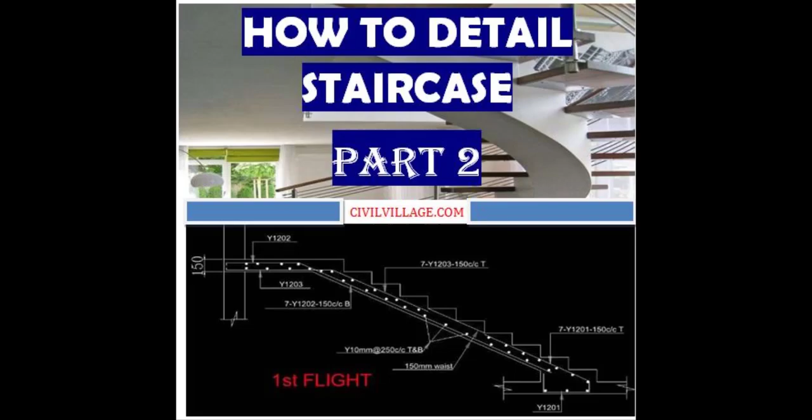Hi everyone, this is how to detail a staircase. In the previous tutorial we did the first half of the staircase, so in this tutorial we are going to do the second half.

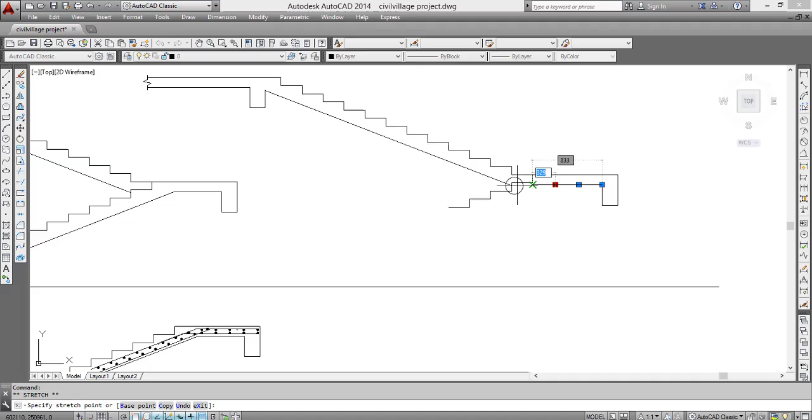As we did in the previous one, we copied this downward, so we are going to copy this one also, and copy it to one side so we detail it separately. Let me fine tune this so that it will be okay.

This is it, so we are going to detail this. Before we start, this is the landing, the first landing, and up here is the slab. This half of the staircase will connect to the slab.

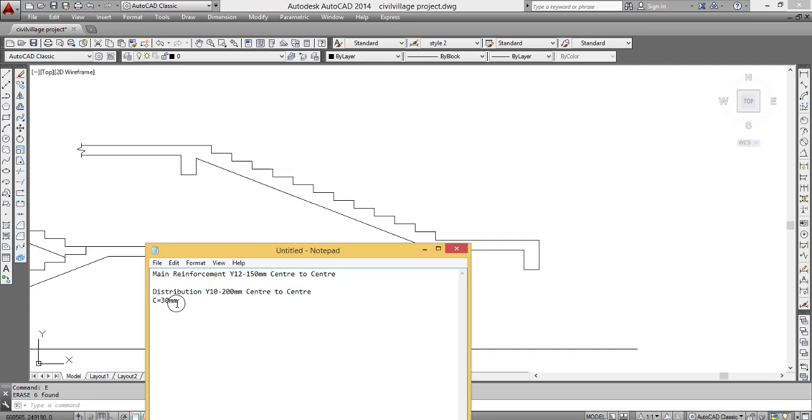As we said in part 1, the main reinforcement is Y12 at 150mm center to center, while the distribution is Y10 at 200mm center to center, and the cover is 30mm. So we are going to start.

We are going to leave a spacing which we calculate to be 36. If you remember, the reinforcement is Y12, half of it is 6, plus cover which is 30, giving us 36. So we are going to copy this and leave a space of 36.

My style is I always first finish with the bottom reinforcement before I move to the top. So let's finish with the bottom reinforcement first. Offset 36, so 36 like that.

Bottom here, 36. I'm going to extend this one, but I will leave a spacing of 36.

When you are going from the landing to the second half of the staircase, the reinforcement will not be like this. This one is like a scissor, so at the bottom here it won't form a scissor.

The bottom here will connect directly to the bottom of the flight. When you are coming from the half landing, the bottom reinforcement here will connect directly to the bottom of the stair - I mean bottom of the half landing to the bottom of the stair.

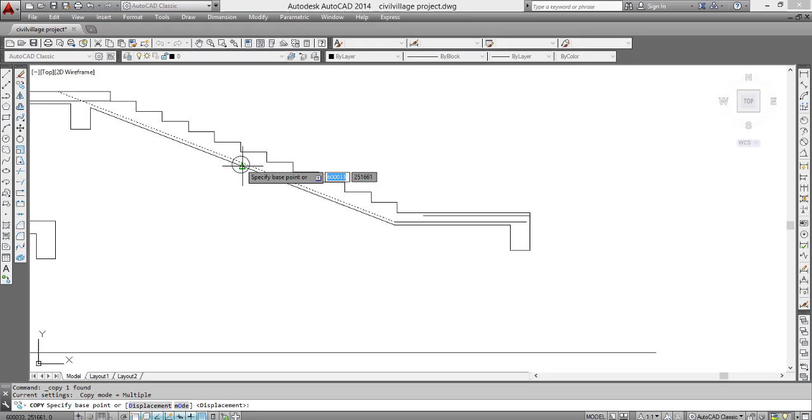Now let's draw the top. We leave a spacing of, as usual, 36. Let me copy this and move it this way, to be able to put the spacing of 36, and remove this.

This is it, so this is the top of that reinforcement, and the top coming here - let me leave a spacing of 36 from here. So the top here, we come here and have an anchorage length.

Let me extend it, let me even extend this. So this top here we have an anchorage length. This is the reinforcement top bar for the landing, so it will have an anchorage length.

The top coming here also - let me first do it for the landing anyway. Let's give the anchorage length of 1 meter. 1 meter is not much though.

Let me make it 900, or 800 rather. 800, anchorage length of 800. So that's the anchorage length for the top bar, you get that one right.

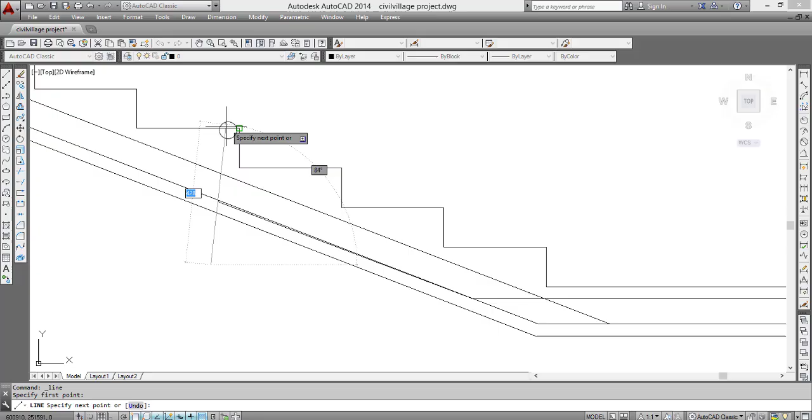So this is the top coming from the landing, and also the top on the flight. This is the top of the flight. Usually the top of the flight will not span through. It always stops at maybe 1/3 of the length of the reinforcement, but I don't usually use the length. I count 1, 2, 3, 4, 5. Maybe like 5 still. 1, 2, 3, 4, 5.

So this is the top for the flight. Top for the flight is different from the top of the landing. Top of the landing have its own anchorage length. This is it. But top for the flight we also have the anchorage length. So I specify 800 for this. Let me also specify 800 for this.

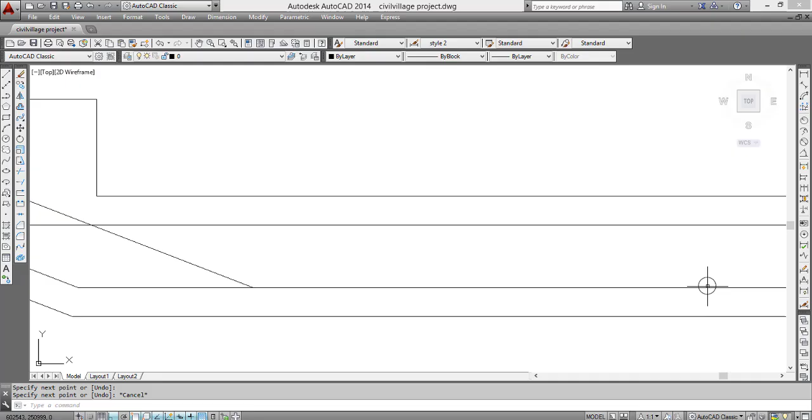Some people use 1 meter. Some people even use half of the length of this landing. So it's an engineering judgment anyway. So let me use the half here.

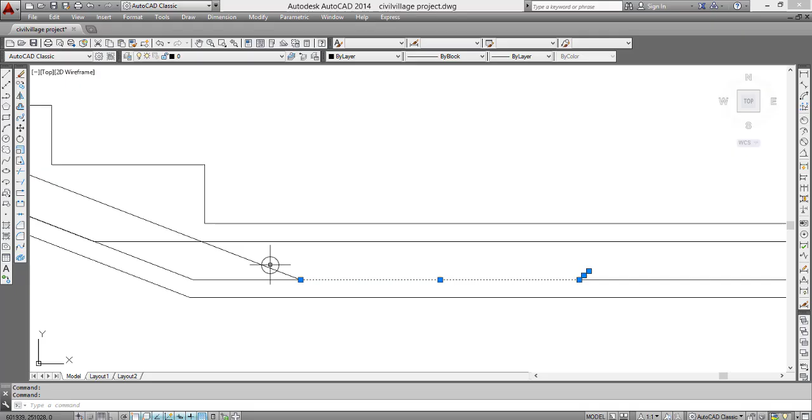So to do this, let me use a kink to specify that there is a reinforcement there. One is here, here is it, here is it, and I will join it together. So this is it, you get it on to right. So fine, let's delete this. So we are almost done.

So now coming to the top here, this is the slab. The reinforcement here, this is the reinforcement coming from the slab. So it will come down. Let me do something, let me extend this. So let me extend this.

So the reinforcement coming from the top, from the bottom. The reinforcement coming from the bottom, we have the anchorage length also, and it stops. Usually we use 800, right? So it stops at 800.

I don't know the trick I can use here to draw 800 downward, but it's simple. Let me do it this way. So 800, snap it and I will write 800. So this is the anchorage length. So for the bottom coming, this is the anchorage length.

So now all I have to do is just draw a kink. So draw kink. So this one, and this one. So now we join it together. I don't need to provide the spacing here, because this continues like that.

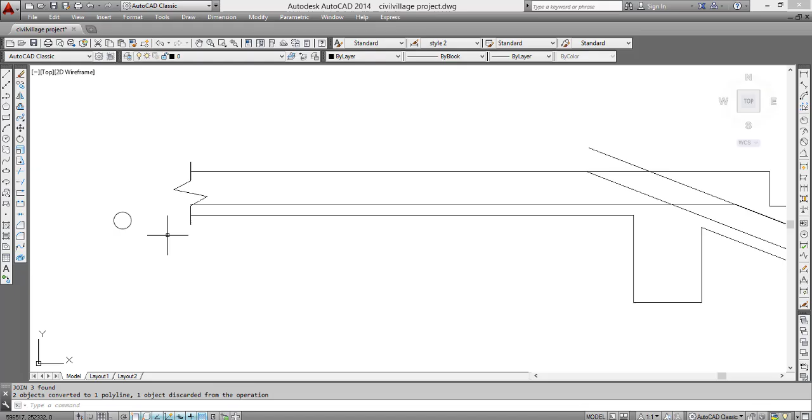So and also for the top reinforcement of the slab, it's downward. So the top we come here, the top will come here.

See the top coming from the slab here for the second landing. We come to the top here. So and it will stop at like 5 risers. 1, 2, 3, 4, 5. Let me use 1, 2, 3, 4, 5. Let me use this as a reference line and use orthogonal to make it straight.

So now this top will stop at this 5th riser. So I'll trim it. So this is it, this top. So this one and this one. So and I will join it together.

Remember, so the bottom bar we did not provide the anchorage line for the bottom, we just first drew it. So this is the bottom here, comes here, and it will have its own anchorage length. So let me draw the anchorage length anyway. So the anchorage length will start from here.

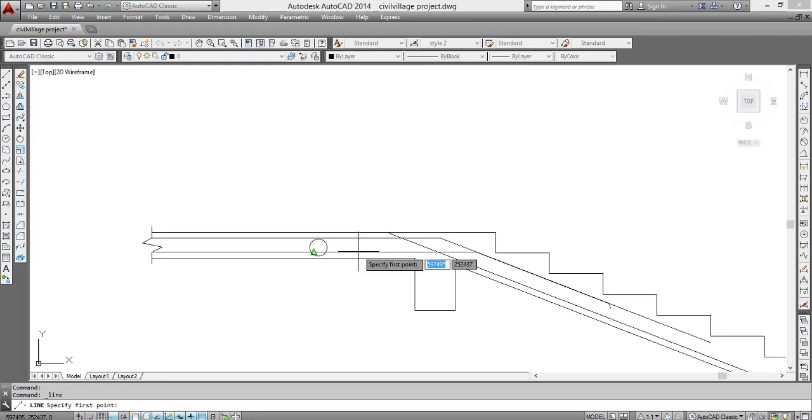So normally the kink, I usually even specify the space. Maybe the kink is 40. I don't know, let me just draw it. So and I will drop it. I will connect it to the one here. I will also connect with the bottom here.

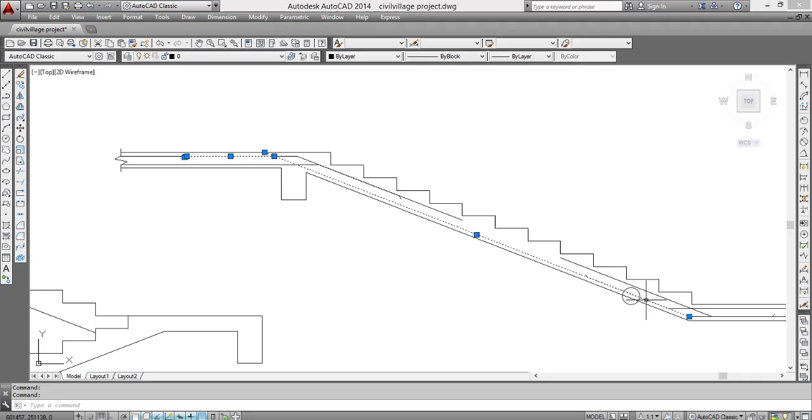You know, the bottom spans from here, and goes on to the end. It reaches up here, and we have this one anchorage length. So now we join it together. But this thing, I don't need it here. So this is actually, oh my god, it's not joined.

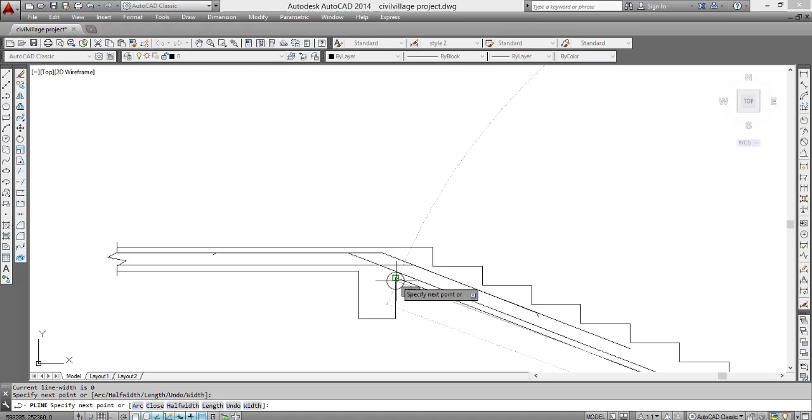The reason we are joining it is because of the distribution bar. We used the path array in part 1, so to make it workable for the path array to work, we specify and join it together to create a path. So this is it, it has joined now.

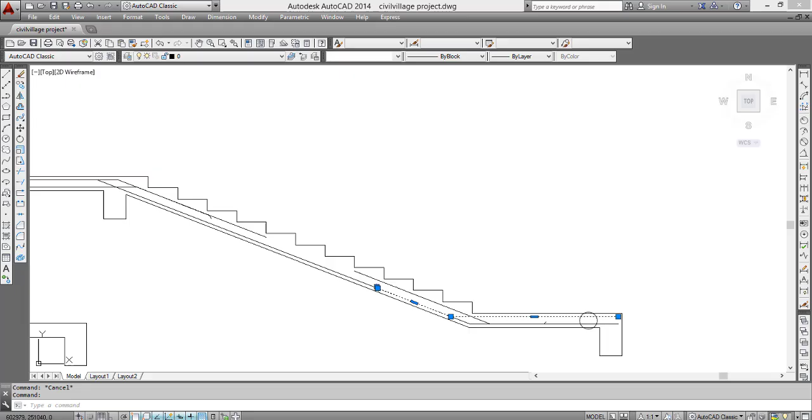So now we can provide the distribution bar, as we did in part 1. Go to draw and pick donut. The inside diameter of that donut is 0, the outside diameter is 30. Come here and specify it.

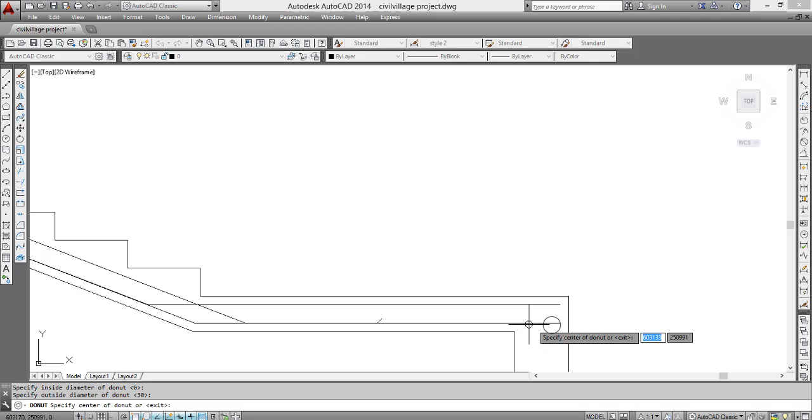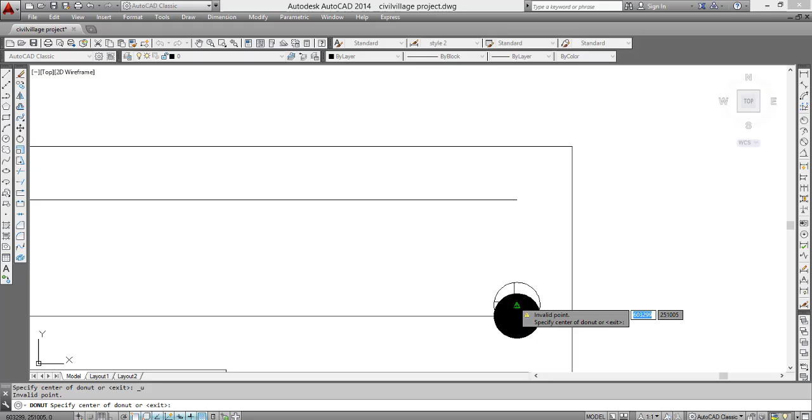The first one we are going to draw is the bottom bar. Since this thing is 30 diameter, we can specify 15 so that it will stay at the middle. No, I don't want that. No, it's not aligned, I don't like it.

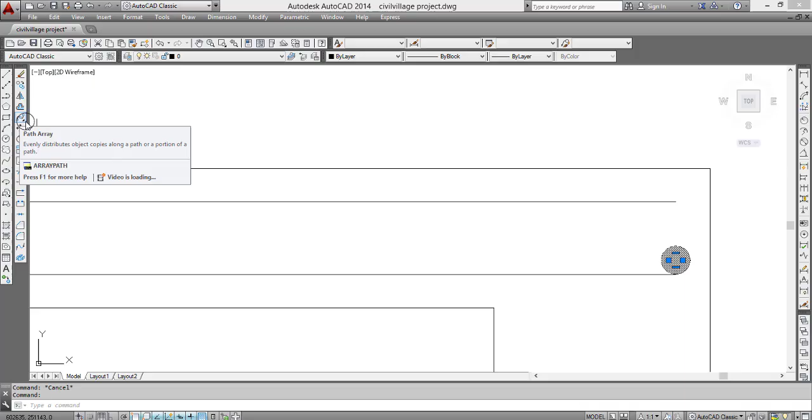So donut: inside diameter 0, outside 30. So 15, I want it to stay on that thing. I think it's okay. So we select the donut and choose the path array. We use path array anyway, and we come to this thing.

I think the AutoCAD software is not responding, so give it a minute. We selected the path array. Let me select again path array and the path. I think it's okay, so now select it and change the distance.

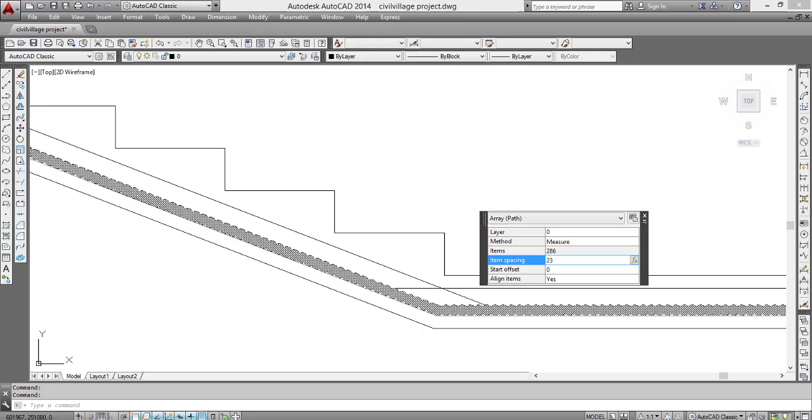I know the distance is 200 mm, so set it to 200 mm, and this place. So this is it. All we have to do is delete the top here, we don't need it.

So this is it. Similarly for the top reinforcement here, the top for the landing, we provide the donut for it: inside diameter 0, outside 30. And we draw it downward.

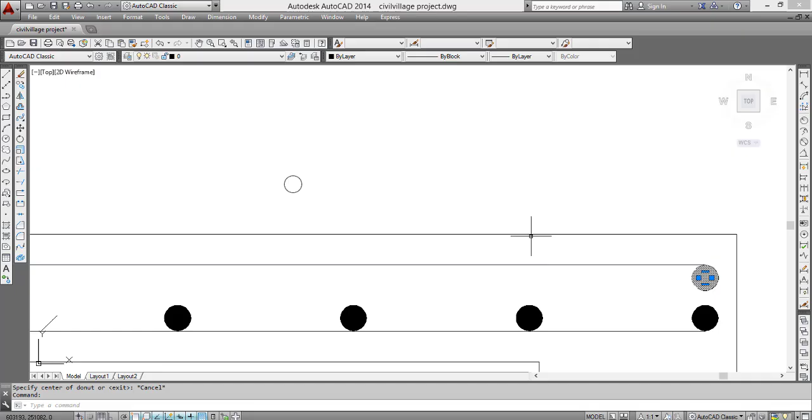We use the path array, click on the paths, and change the distance, which is 200 mm. So this is it, that's it. But all you have to do is delete the one below.

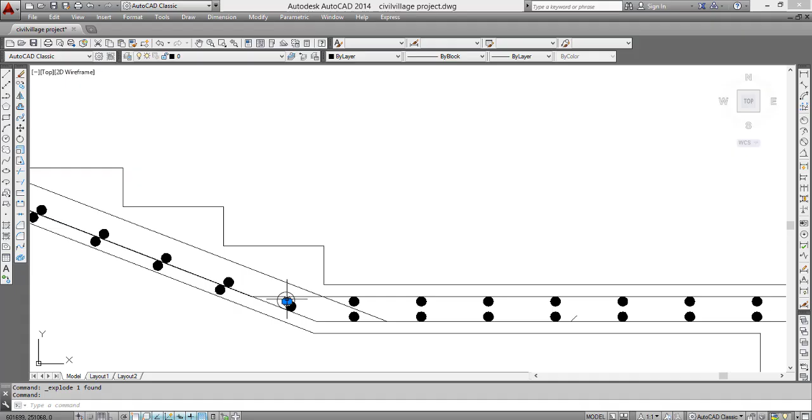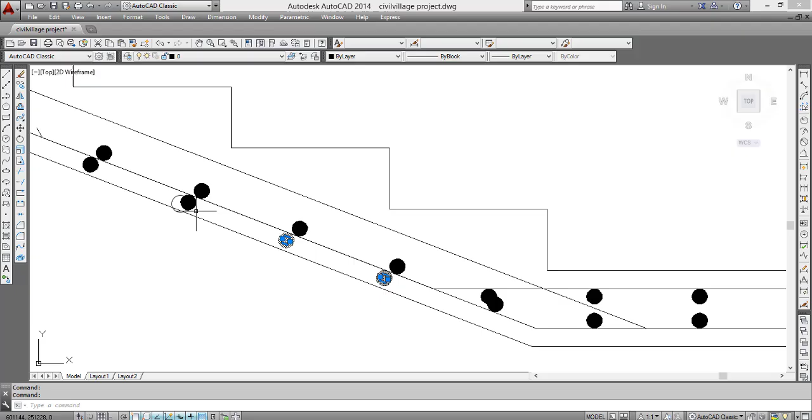I even need to stress this one a little bit, so it doesn't need it. Just let me delete this. So let me delete this. That's all, we are done with the top and bottom here.

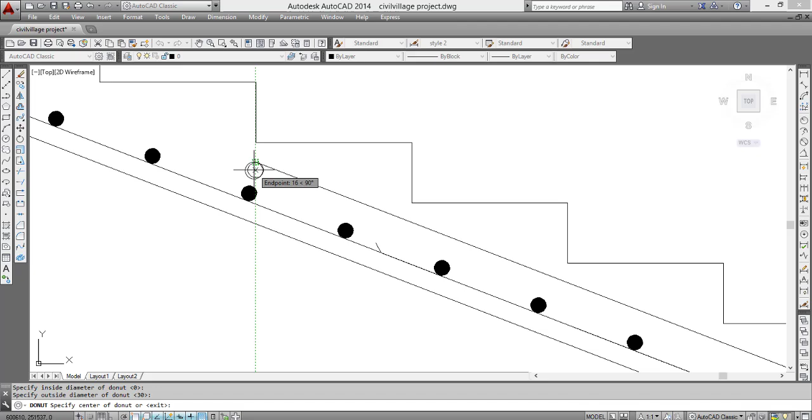So the distribution for the top of the flight, the top reinforcement of the flight - I will draw the donuts, enter 0, 30, and draw it to make it align. We click it and select the path array, click the path, then change the spacing, which is 200 mm, then enter. You can't use spacebar, you use enter.

And then use this, then delete the one below, we don't need it. So also for this, let's start from here, shall we? I think the top here coming here will nick with this. Does it? It doesn't nick.

Let me use my trick, the polyline, to nick it together. I think it's a nick. It's not aligned, I don't like it that way. I like it to be aligned, so the polyline once again.

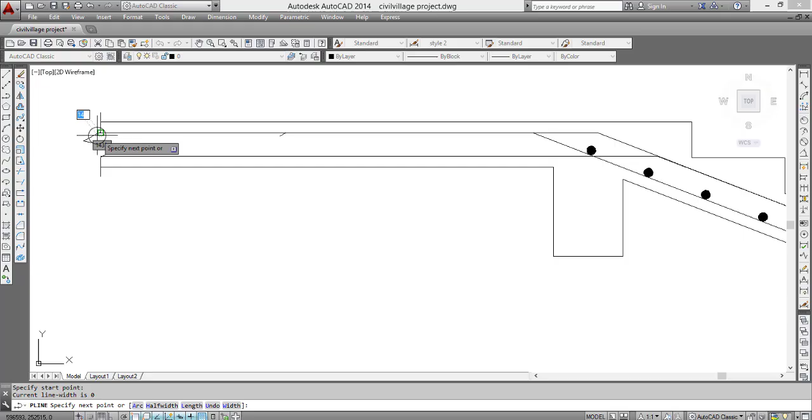I see, maybe that is the reason why it's not joined in the first place. Join it, then... I think it's okay, so this is it.

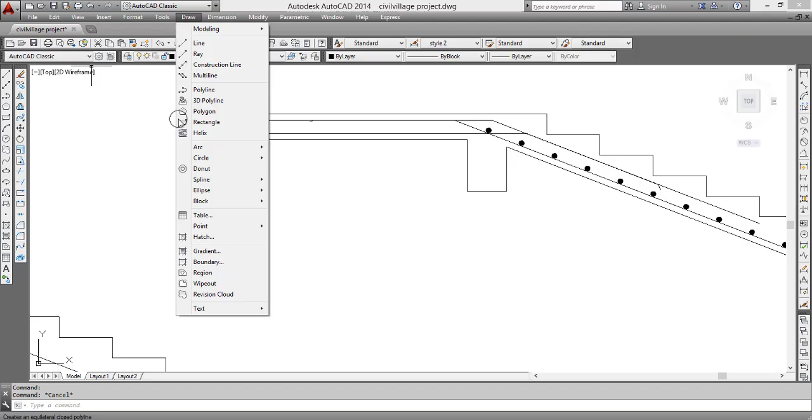So I can now draw my donut, 0 at center, 30 at the edge. We draw it and make it 30, the 15. Select the object, click the path array, select the path, and then it's good.

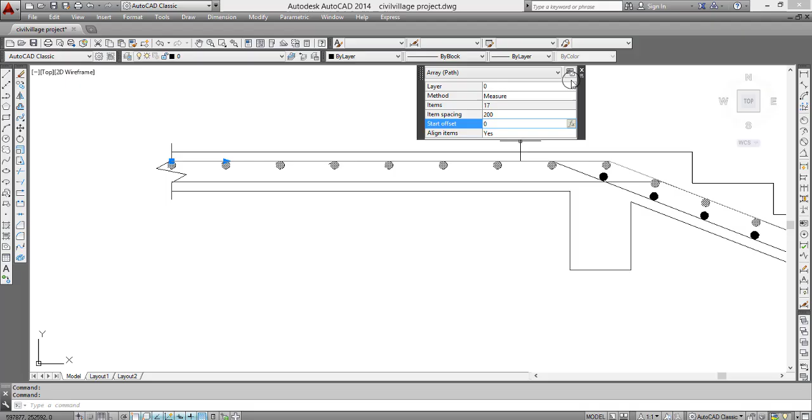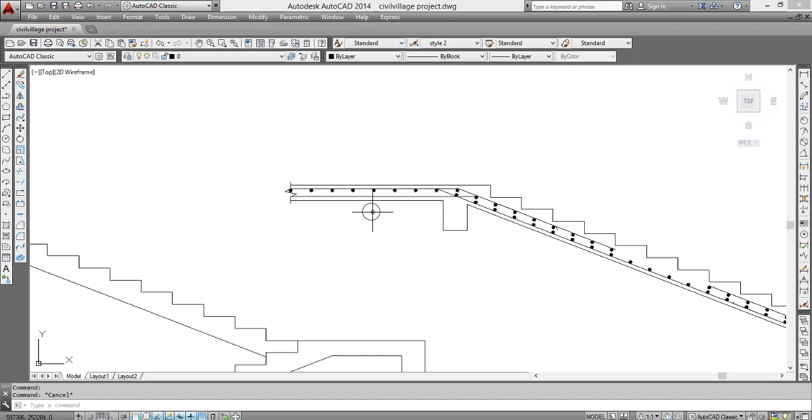All we have to do is just change the distance to 200. I double click on the object to change and see the property. If you are using a higher version of AutoCAD, you can easily find it somewhere around here. All you have to do is change the item spacing, or click it and right click to change it, depending on how proficient you are in using AutoCAD.

Now the bottom for this - I think the bottom has the anchorage length, and it is not joined together. Let me join it; it's not joined, so no cause for alarm. Let me use this.

I think I didn't select it properly. Let me undo and choose the polyline again. Let me select it from here.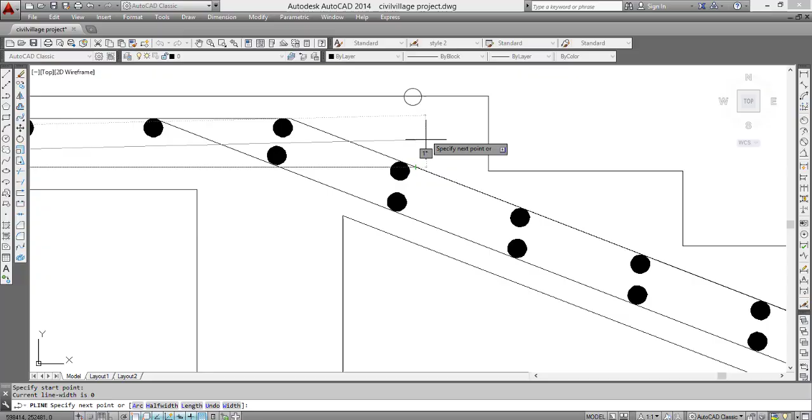I actually want it to connect so that the path array will work for it. That is my mission, so I think it's okay like this. It's joined, so I can use the path array.

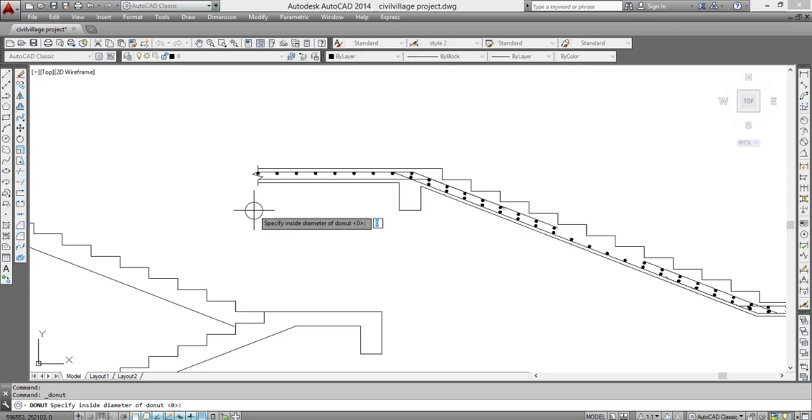So I can use the path array to choose donut, 0 inside diameter, 30 for outside. Now let me start from here. Oh no, I don't like it. Let me move it properly.

I think this snap is confusing. Let me turn it off.

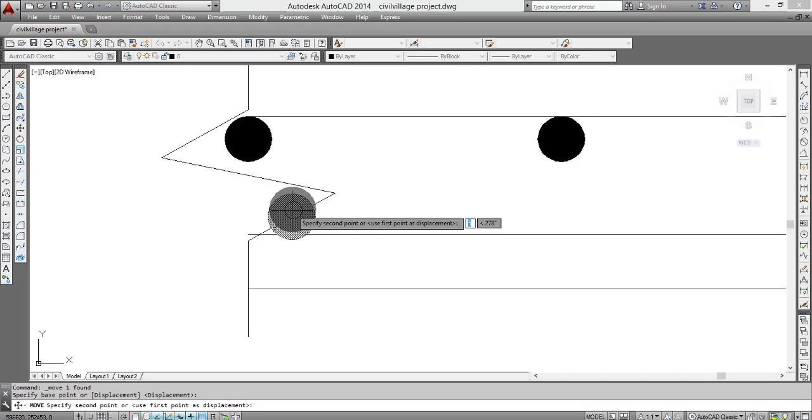And that's good. Now select the object, come to path array, then select the path. All I have to do is change the property and make it 200 mm, then enter.

So now I will delete the top ones.

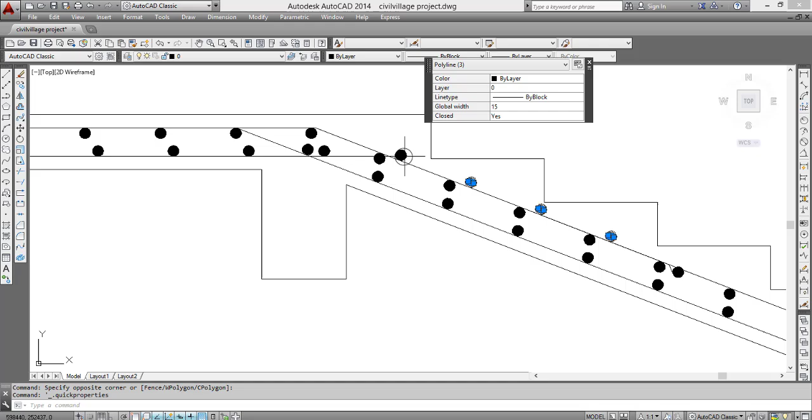So the next thing in line is to annotate. We are done with this. So the next thing in line is annotation.

So we copy the annotation here. Of course, we have done that in part 1, so we don't need the repetition to save seconds.

So all I have to do is change it. I copy this, copy.

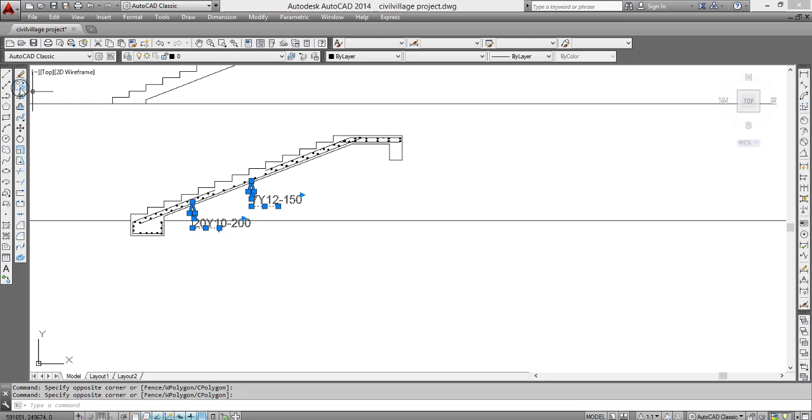So I won't waste time doing this anyway. You've got the point, and you know how to detail, how to annotate from part 1, so you can use that idea to do the annotation for this to save time. So let me just do this.

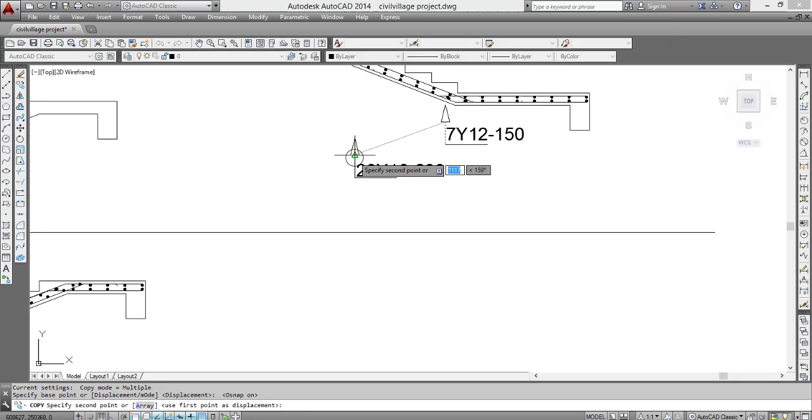So copy it and come to Y10 at 200, that's the distribution. Y10 at 200, that's the distribution.

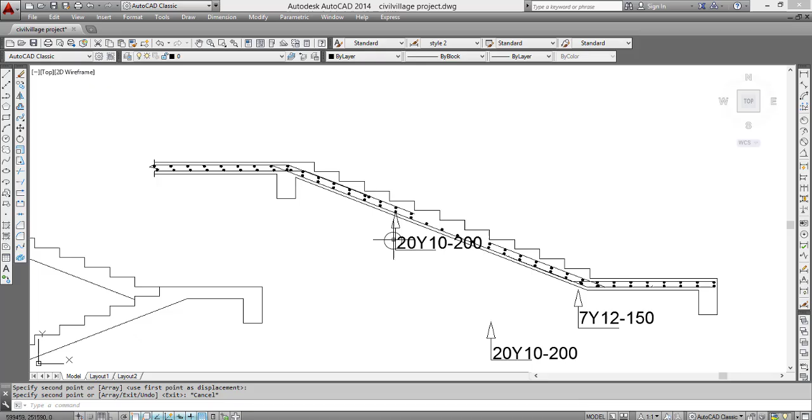I don't like it the way it is like this, so I will draw this and I will move this.

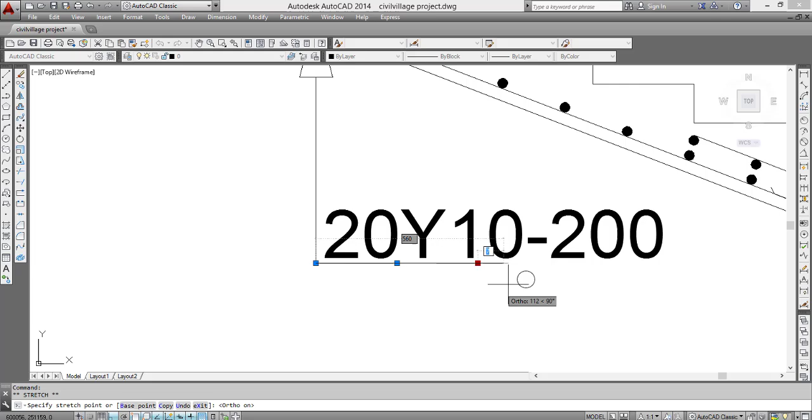So I even extend this line so that the thing will be aligned. It's good to make the work align. So that's it. And this one, which is a main reinforcement.

Which is a main reinforcement. So I just need to remind us that

the annotation we do for both main reinforcement and the distribution, for the flight, for the landing, and for the slab upward.

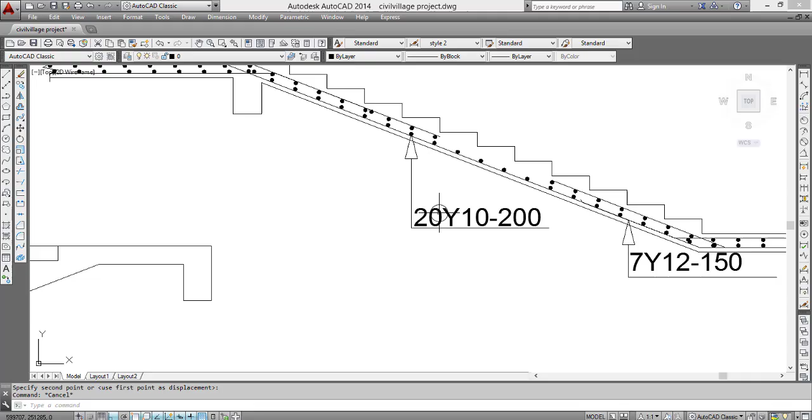So one more thing, the number of the reinforcement we are going to provide. So for this

flight, so the spacing, the span of that, the width of the flight is actually 1 meter. So we got that one from here.

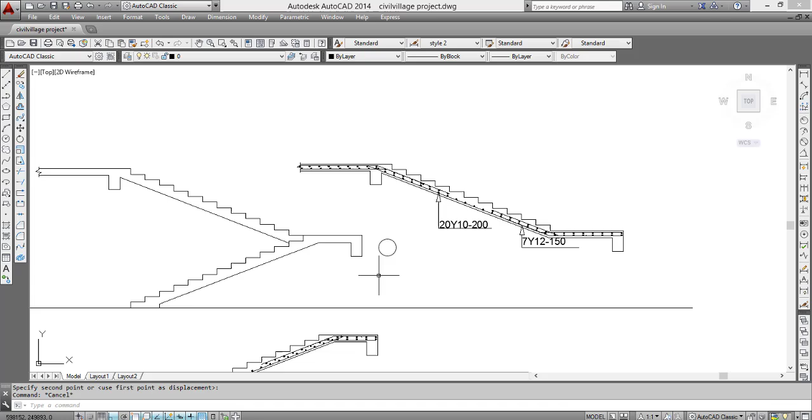So let me show you the 3D so that you can see very well. So I made the distance from here to here, the reinforcement will span like this. Let me just help with this.

The reinforcement will span like this. Let me put it at the module. So with the span like this, 1, 2, 3, like this.

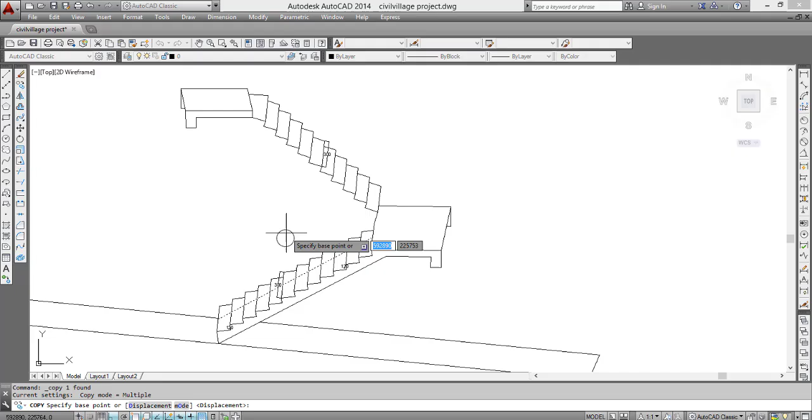Let me copy and make it more practical. So let me turn this off. So the reinforcement will span like this.

It will span like this, like this, like this, like this. So the number of reinforcement we are going to use throughout that length is what I'm trying to find.

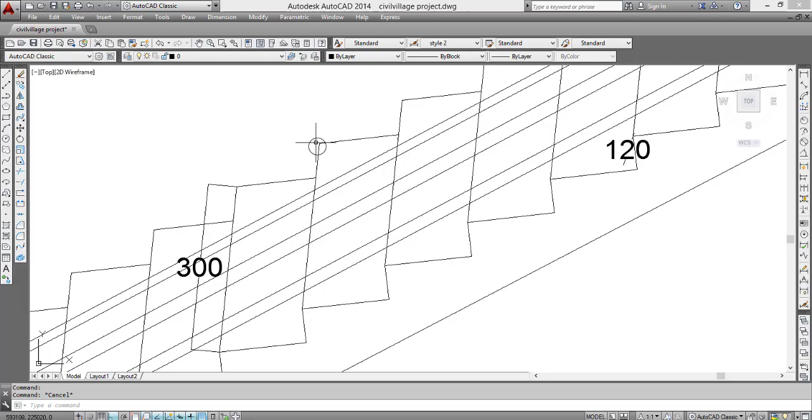And from here, from this point to this point is 1 meter. You get that one right now.

And we are using a spacing on this side of 30, and on this side spacing of 30. So 30 plus 30, that's 60.

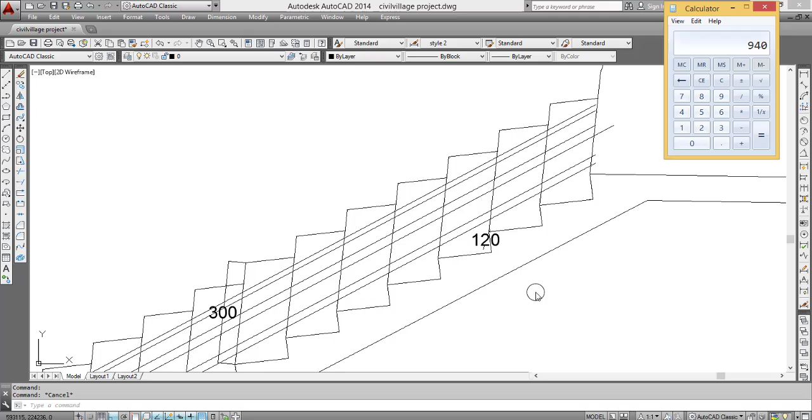60. So 940. So now this 940, we are going to

divide it by the spacing of the distribution bar, of the main reinforcement. So calculator, where is it? So divide it by 150, which is a Y12 reinforcement bar.

So this is, instead of writing, it's 6.26 something, it's 6.26 something. So we are not going to write that 6.

It's good to have more reinforcement than to have less reinforcement on the site. So I made it 7, and I wrote 7.

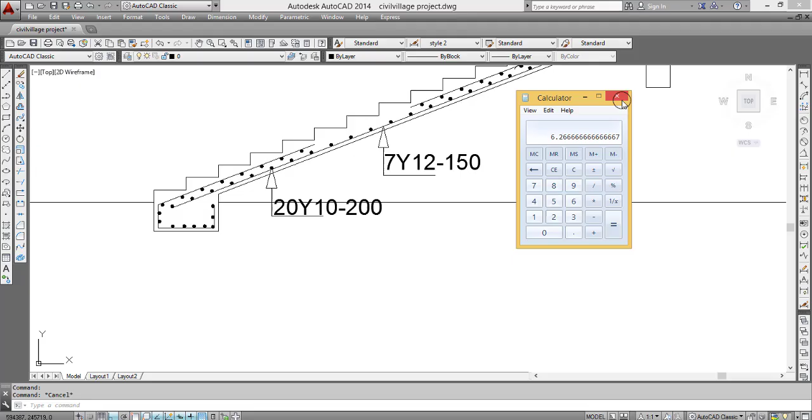So that's good. This comes to the end of the tutorial for the second half of the stairs reinforcement.

So in the next tutorial we are going to try using calculate, how I got this thing. I just gave you the value.

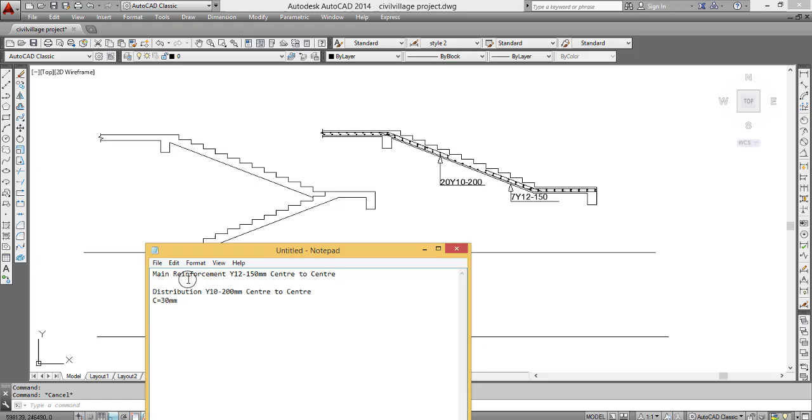So how I got this value, the main reinforcement Y12 at 150 center to center, distribution, but how I manually calculated it, and it's a very short way.

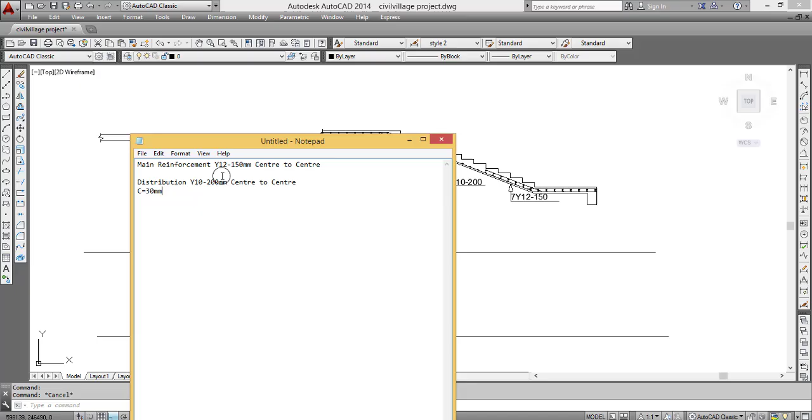So when you are doing your modeling in any software and you want to quickly add your staircase load to the beam, you can quickly calculate it manually. So you will get the value and you distribute the load. Later on you will detail your staircase, the one I did.